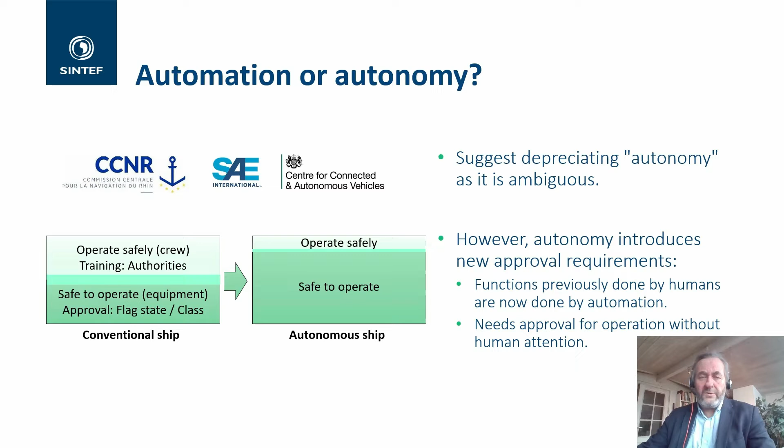So we think that you can define the difference between automation and autonomy as follows, saying that automatic is a process or equipment that under specified conditions can function without human control. That means it can do it, but it's not necessarily approved or fully designed to do it, while autonomy means that the same process or equipment under certain conditions is designed and verified to be controlled by automation without human assistance. And this captures, in our opinion, the central difference between autonomy versus automation.

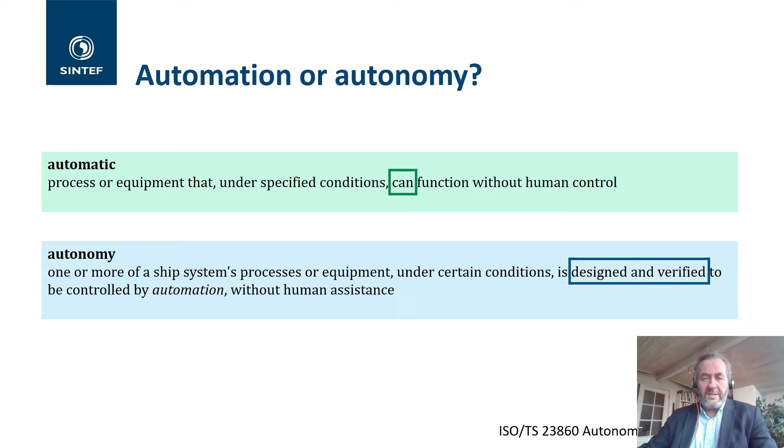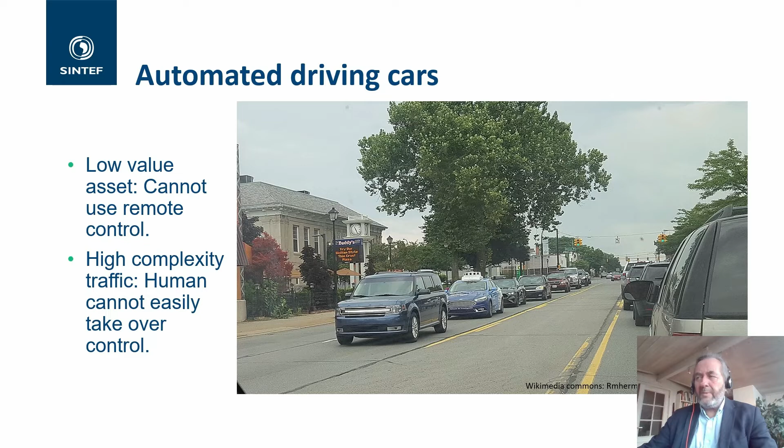Going to the car sector again, these are relatively low value assets, and it's very difficult to see that they can be controlled by a remote control center or something like that. It's also a very complex traffic situation, and it's very difficult for humans to take over control if the automation fails. So basically, you probably have to go for full autonomy here if you want to go to a higher degree of automation.

Then we have something we call industrial autonomous systems, which could be a metro or a light rail system, an autonomous mining truck, or an autonomous ship. And these are high-value assets, and you probably want human supervision in any case, independent of the level of automation. There's also very high damage potential if something goes wrong, and this also points to the wish of having a human supervisor somewhere in the loop.

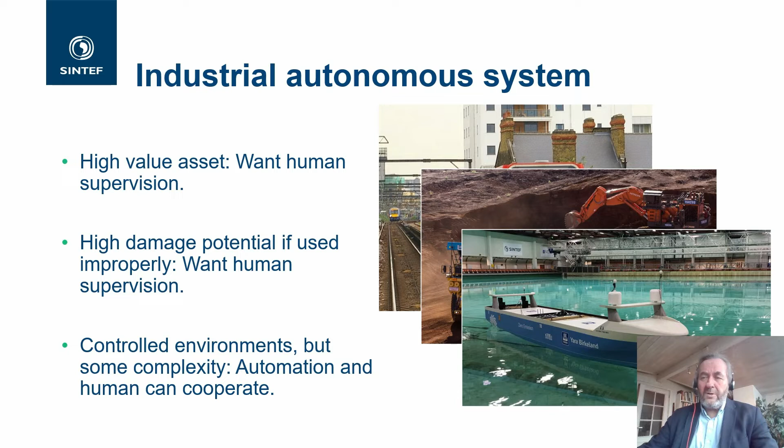And the environments are relatively controlled compared to the streets of the city, but there is still some complexity. And this opens up for a kind of cooperation between automation and human. Automation can take care of most, but humans can assist when automation fails.

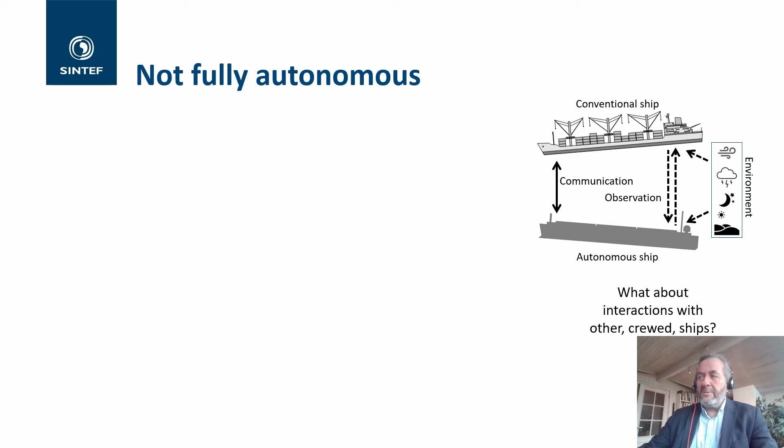We do not believe that the ships will be fully autonomous, and this is exemplified by an encounter between an autonomous ship and a conventional ship. There's a lot of operations that the automation system has to do to safely avoid the conventional ship, and there's also a lot of things that can go wrong.

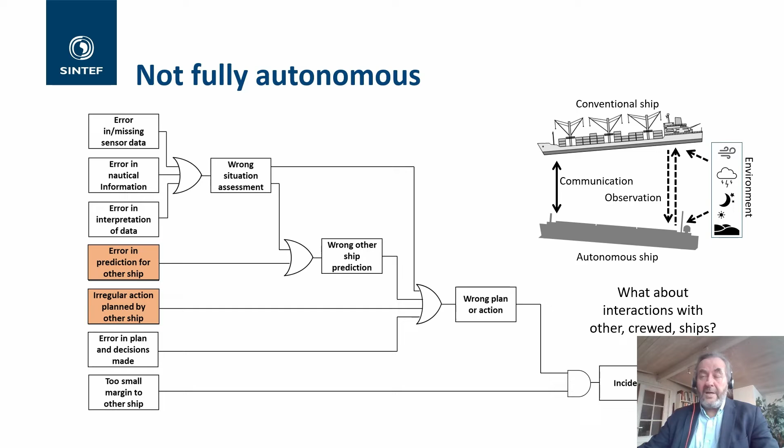Here we will highlight two particular things: the automation system has to predict what the other ship will do in a given situation, and you have people on board, so you do not really know exactly what the ship will do. And related to that, the automation has to make sense of any unexpected action by the other ship, which will certainly be a possibility when you have people on board. Irregular action can be for a good reason, but it's very difficult for automation to understand it.

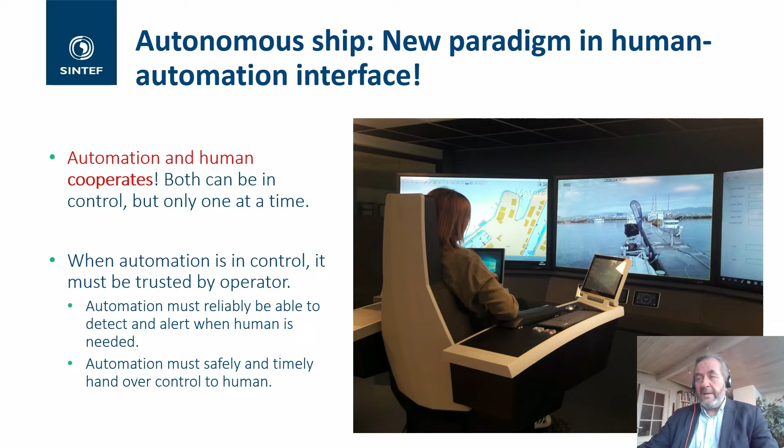And this again means that autonomous ships are a cooperative endeavor between humans and automation. This also introduces a new paradigm in human automation interfaces for ships. Both can be in control, but only one at a time, of course. And if you want automation to be in control, it must also be trusted by the operator, otherwise it's useless. This means that automation must be able to detect and alert when a human is needed, and that the handover is safe and timely when control is transferred to the human.

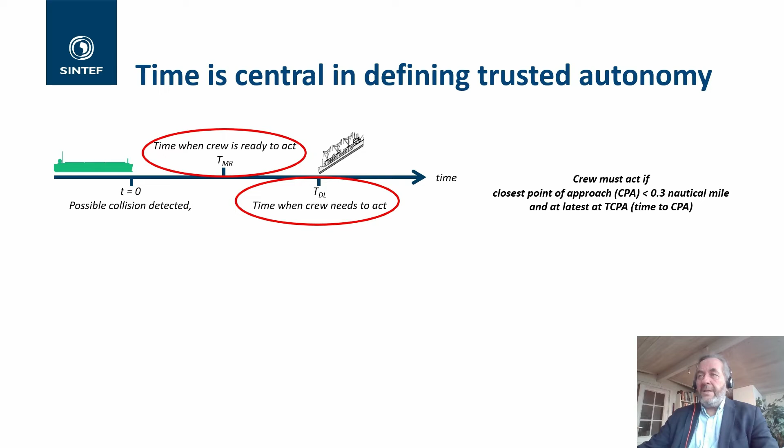But you also have TMR, which is the maximum response time for the crew. That's when the crew will be ready to act if you alert the crew to the situation. And this means basically that if TDL is larger than TMR, it's safe for the automation to continue operation. And it also allows us to define degrees of automation and control, as shown here.

Just pointing out A1, partial automation. Automation is able to handle the situation for some time, but it doesn't know for how long. So it doesn't support this type of autonomy we are talking about. Constrained automation, on the other hand, here you know the time and you can compare it to TMR.

For the humans' degree of control, it's worth noting C2, where the maximum response is 1 minute. And this is kind of typical for a remote control center where the operator is engaged with a number of ships and needs to switch between them. And that could take a minute or two.

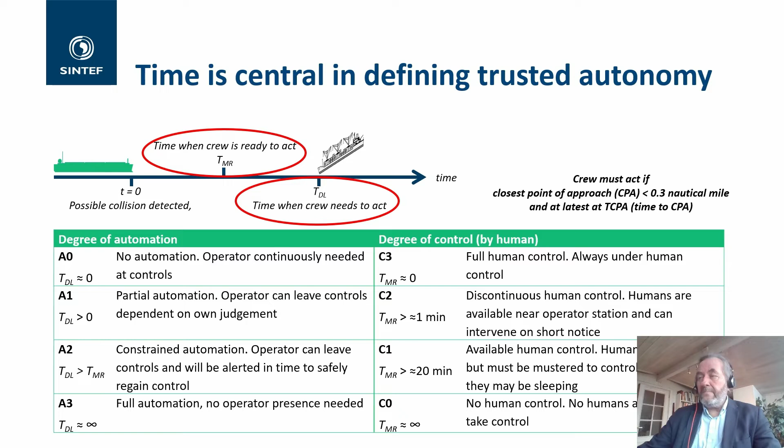C1 represents a situation where the crew is sleeping on board the ship during nighttime in good weather and good traffic conditions. And also here it will be possible to muster and get the crew back to the bridge in time to take actions if the TDL is larger than 20 minutes.

These degrees can also be used to define classes of autonomy, as shown here, where you have fully autonomous in the corner, and operator exclusive, where the operator has to be there at all times. And then in between you have this AC area, where you have this constrained autonomy or autonomous control, where the automation is able to control the system and also knows for how long it can do it.

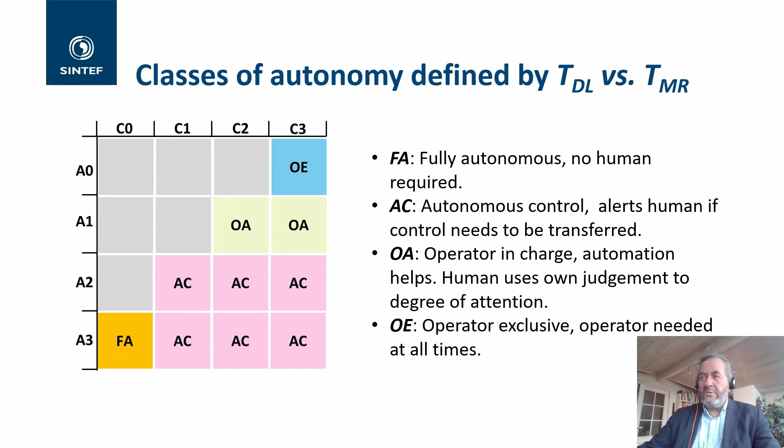Operator and automation cooperation is in the area where automation is able to control the system, but where the operator has to use own judgment as to how long he or she can be away.

We propose to integrate all this into the operational envelope, which describes what the combined system can do, including both humans and automation. And this will partly be the general condition, that is the state space under which the system is safely operating. It's including the division of responsibility between humans and automation in this area, and also defining how system control tasks are executed in the different parts of the area. And finally, you also have to define fallback states for handling situations where the operational envelope is exceeded.

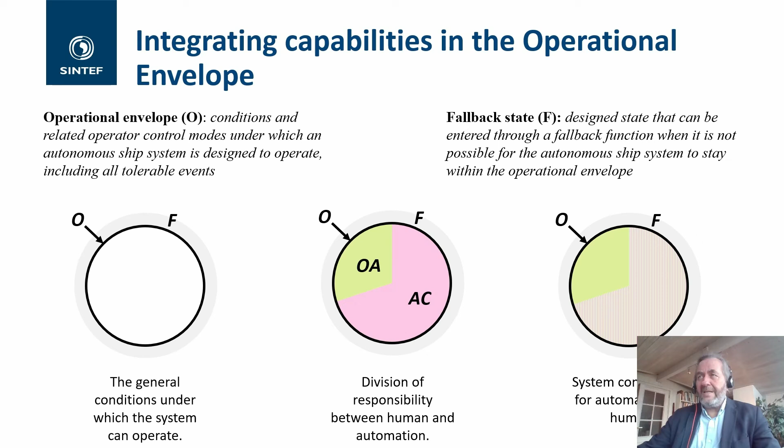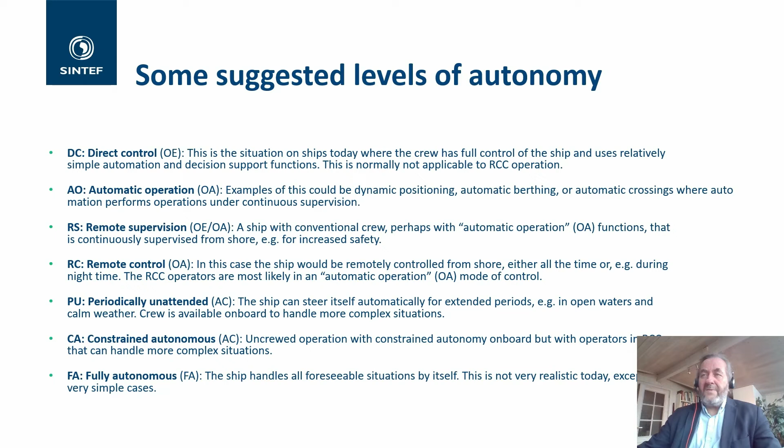These are very formal definitions that are quite useful in approval processes and design processes, but it may also be useful to have a kind of more human-readable definition of autonomy levels. And this has also been listed in the paper as a kind of logical combination of RCC and ship manning levels, as well as a level of automation.

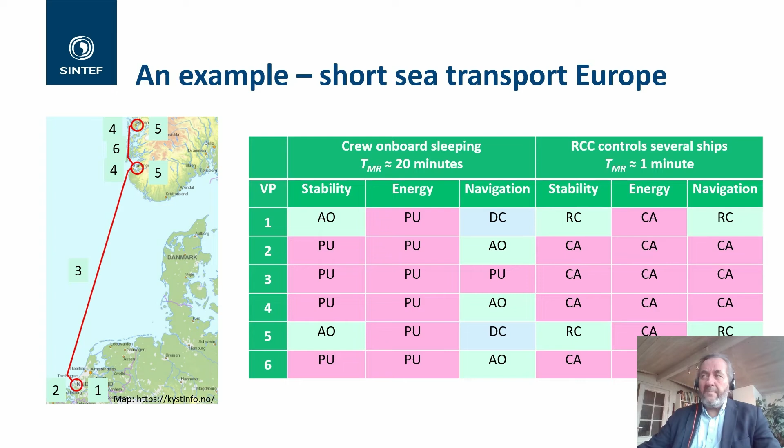We also provide an example in the paper that you can have a look at if you like, showing how short sea transport from Rotterdam to Norway here in Europe could look in this setup.

So to conclude, we still believe that autonomy is a useful concept, at least for ships, and that we should retain it, but with these more formal definitions we have proposed. We also pointed out that we will require a new type of cooperation between automation and human, which will have to be catered for in the new designs.

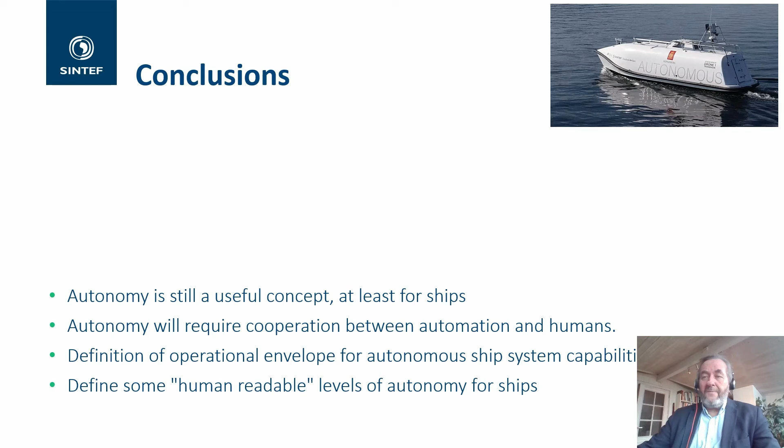We have pointed to the definition of the operational envelope as a more formal description of autonomous ship system capabilities. And we have also added some human readable levels of autonomy for those who want to do that.